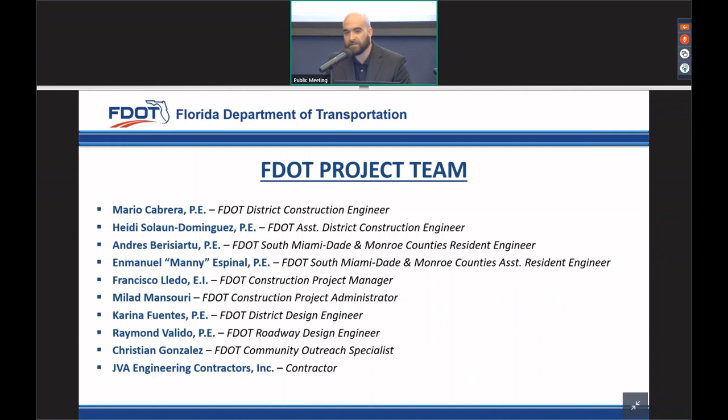To introduce our project team, here with me at the front, I have Francisco Lledo, who is the FDOT Construction Project Manager, and Raymond Valido, who is the FDOT Roadway Design Engineer. With that, we will start our presentation, and I will formally introduce you to our project manager, Francisco Lledo.

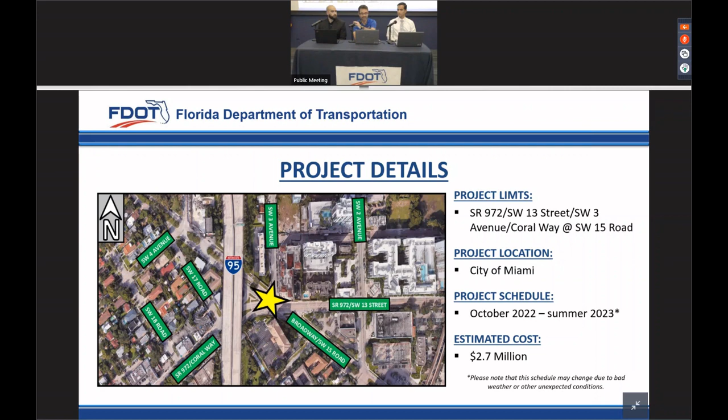Hello, good evening. Thanks for attending today's meeting to talk about this exciting project. Some project details that we're showing here in this slide: the project limits for this contract comprehend Southwest 13th Street, 3rd Avenue, Coral Way, and 15th Road. The start date for this project will be October 17th, next Monday, and the estimated completion date will be around summer 2023. The project budget is around $2.7 million.

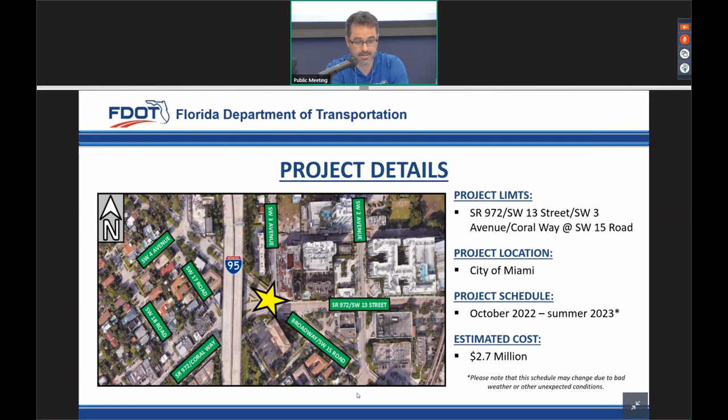Currently, 13th Street, Coral Way, east of the intersection, carries around 26,500 vehicles per day, while Southwest 3rd Avenue, Coral Way, west of the intersection, carries an estimated 30,500 vehicles per day. Movements throughout the intersection result in a very skewed approach, unconventional geometry, and provide minimal opportunities for pedestrians to safely cross the road. The existing intersection alignment currently prohibits several vehicular movements: eastbound Southwest 3rd Avenue, Coral Way, to northbound on Southwest 3rd Avenue and Southwest 15th Road; westbound Southwest 13th Street and Coral Way to southeast on 15th Road; and southbound 3rd Avenue to eastbound 13th Street or westbound 3rd Avenue Coral Way.

Upon completion of various traffic studies conducted between September 2013 and August 2017, it was concluded that the preferred alternative would be a roundabout with metering signals, providing traffic greater access to the immediate area and improving pedestrian mobility.

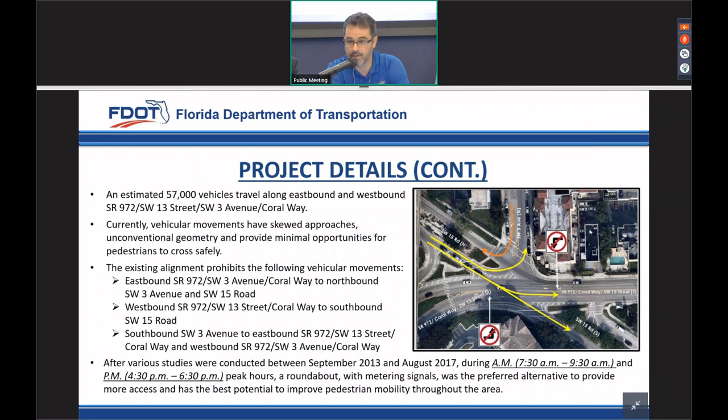So the scope of work for this contract includes reconstructing the existing intersection into a roundabout, installing high emphasis crosswalks, installing new drainage structures, removing on-street parking along 3rd Avenue north of 15th Road, replacing existing high-pressure sodium lights with LED, and installing new decorative light poles. Also, we're installing new pedestrian and vehicular signals, enhancing landscaping, and repaving and restriping the road.

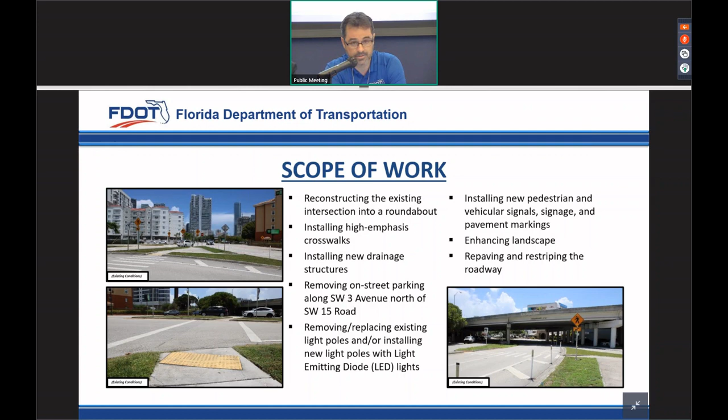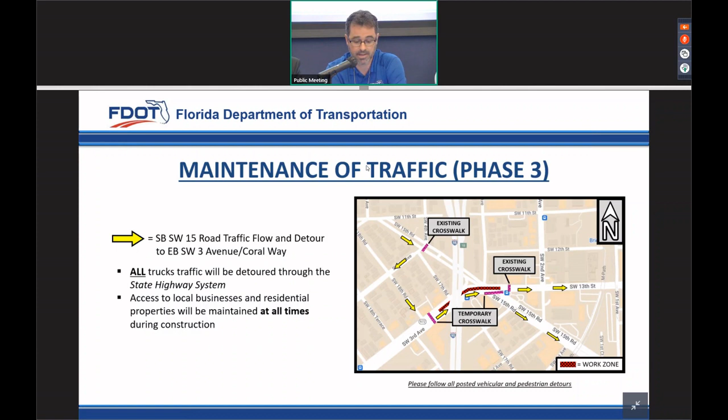During phase 3 of the maintenance of traffic, the yellow arrow shows an alternative route very similar to phases 1 and 2, for any vehicle traveling southeastbound on 15 Road and trying to access the south leg of 15 Road and 13th Street. Vehicles will be detoured through Southwest 4th Avenue, and in this case through 18 Road, and finally Coral Way. Truck traffic will be detoured through the State Highway System, and access to local businesses and residential property will be maintained during the whole life of the project.

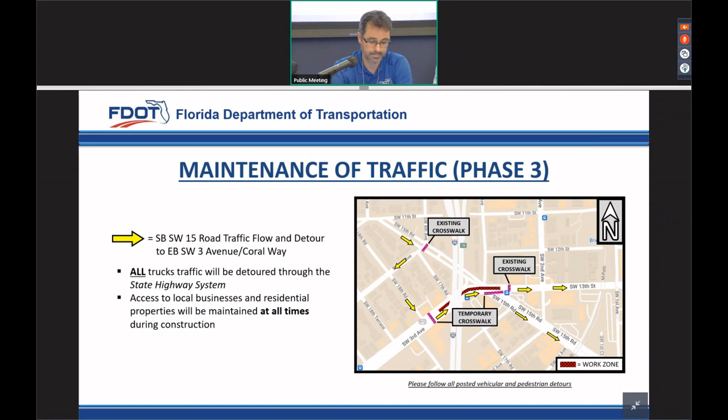This intersection is proposing metering signals on 3 of the approaches of the roundabout. We have one on the southeastbound on 15 Road, another one on the northeastbound of 3rd Avenue, Coral Way, and the third one is on the southbound of 3rd Avenue.

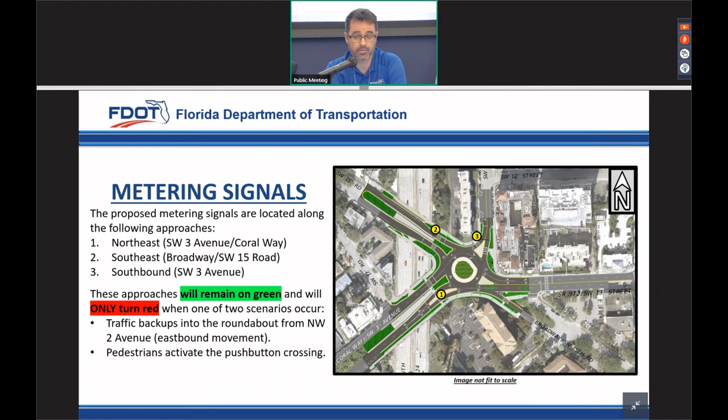It's important to note that these approaches would remain on green and will only turn red when 2 particular scenarios occur: traffic gets backed up from 2nd Avenue eastbound movement, and/or when any pedestrian actuates the ped post, trying to go across the road.

Thank you, Francisco. Some of the things we are expecting during construction: please make note of traffic shifts and uneven surfaces during construction phases 1 and 2, throughout the project corridor.

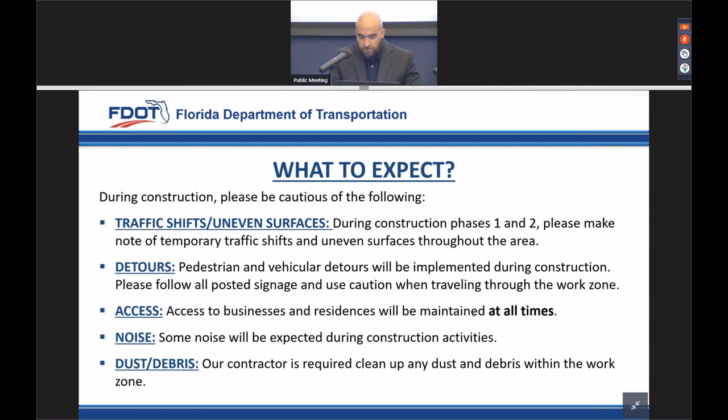As far as detours, although we do have pedestrian and vehicular detours implemented, during construction please ask the public to make sure they follow all posted signage and use caution when traveling through the work zone. As Francisco mentioned earlier, access to both residents and businesses will be maintained at all times.

As far as noise, it is to be expected during all construction activities. Regarding dust and debris, we will ensure that our contractor cleans up any dust and debris left behind within the active work zone.

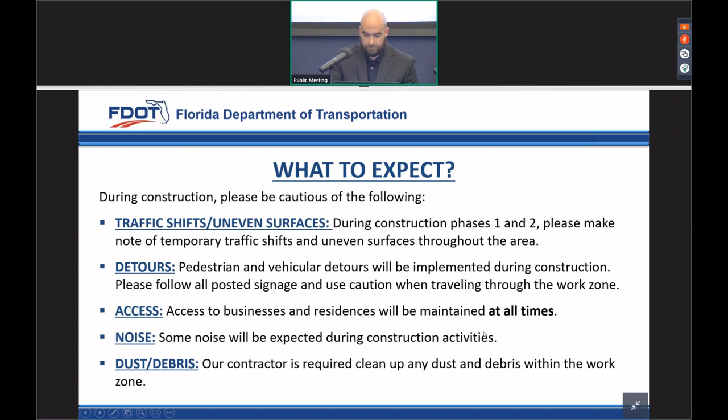In addition to both pedestrian and vehicular detours, travel lanes and sidewalks shall be closed only during non-peak hours on non-event days. Those non-peak hours are 9 a.m. to 3:30 p.m. on weekdays and weekends, and 9 p.m. to 5:30 a.m. Sunday through Thursday nights.

Again, please note that all construction activities will occur in phases to minimize the impact to the community. Lane closure information will be posted weekly on the department's website, fdotmiamidade.com.

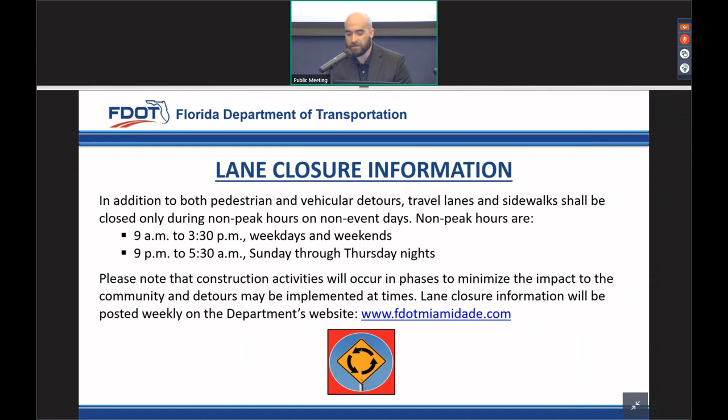Some additional information and tips on how to access roundabouts. Roundabouts have been shown to reduce injuries and fatalities by up to 80% and are designed to travel in a counterclockwise direction. Before entering the roundabout, we ask drivers to know which way they want to go first. Once in the roundabout, drivers must yield to other traffic, pedestrians, and bicyclists coming through the area.

We ask motorists do not change lanes or stop within the roundabout, and please obey all posted signs and speed limit. Additional information regarding roundabouts can be found at fdot.gov/agencyresources/roundabout.

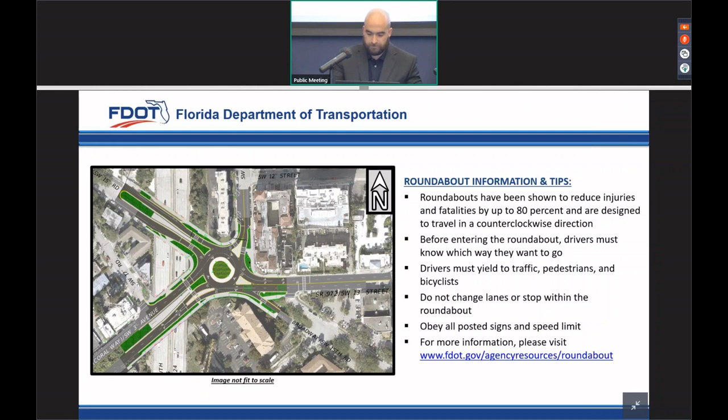As far as community outreach, our outreach consisted of door-to-door distribution to all businesses in and around the corridor. We're also having mail house distribution, where those attending this meeting did receive or should have received a postcard indicating this meeting was happening both in person and virtually. We've had briefings with both elected officials and special groups to ensure all aspects of this project were met and everybody was notified properly.

As far as electronic and digital distribution, we're going to be using Constant Contact as our mass mailer system, and also general email communication. All this information that we're presenting here today can be found on our project website, including the presentation you see behind me, all the reports, updated lane closure information, and the public can also sign up to receive email updates directly from our website.

We do encourage the public, both virtually and in person, to sign up for email updates so that the entire community and the entire public is kept up to date and in the know with what's going on regarding this project.

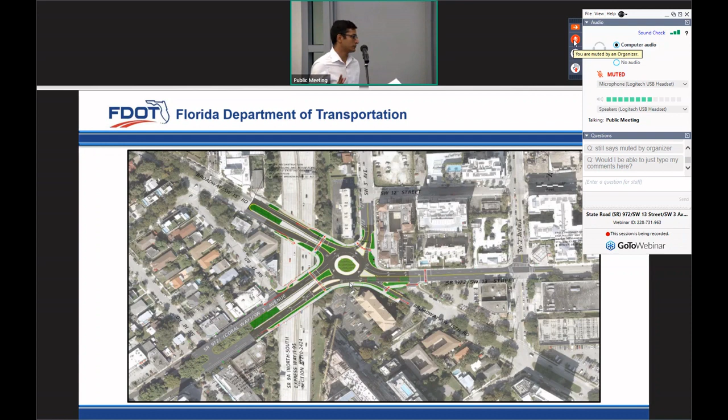The pedestrian is not competing with anybody else. It's the time for you, the pedestrian, to take that time and walk, which is per the FDOT standards. So nobody's competing with anybody, pedestrians have their own time. No, I'm not saying how long you have to walk across, I understand it's enough time to walk across. I'm saying how long is the waiting upon actuation of the button? It's always going to be immediate. From what I'm seeing here, it says 4 seconds, if I'm reading it right, before the actuation starts. So you're looking at just a matter of seconds.

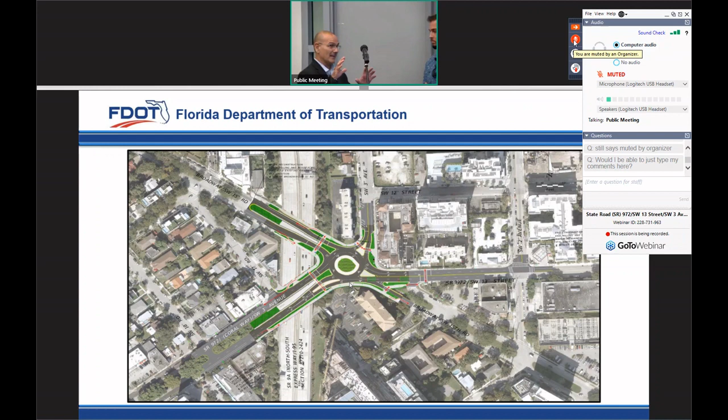You're always looking at just a matter of seconds. Miami-Dade County will always prioritize the pedestrian crossing over the vehicular, specifically at this intersection, because you have schools and a lot of volumes of pedestrian and bicycle use.

So will Miami-Dade guarantee that it stays 4 seconds or less? Can you guys put a guarantee on it? Because there's a traffic actuation signal on US 1 that used to get pressed, between 22nd Ave and 27th Ave. It's like the safest place to cross US 1, and FDOT reduced the timing on it. I know these sequences can change rapidly, and it's a very little thing that no one notices, but it makes walking and biking way harder.

So look, we have the plans that we're open to showing you. Mike Sodi and his team handle a lot of the timings through DTPW. We can ensure you that this is a pedestrian signal, not a regular vehicular signal. We're more than willing to sit with you afterward and walk you through it, and provide you an email of how we typically do that, what the typical timing would be, but we would not violate any of the national criteria, which considers walking time and the amount of time you actually have to cross.

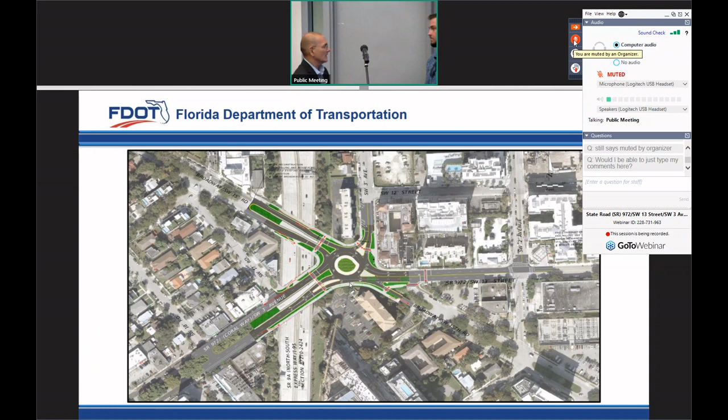Okay, I get it, but the guarantee is the pedestrian will be prioritized. That would be the guarantee. I know, but it's like a breach of a guarantee because we're already not prioritizing the pedestrian. Prioritizing the pedestrian would have meant raised crosswalks and all these other things we've talked about. So we're already going into this with an extra negative, and now the guarantee is that we're going to prioritize the pedestrians, but everything up until this point hasn't.

So it's tough, I respectfully disagree. I think we are prioritizing pedestrians, we have road plans, and we're more than willing to discuss this. I will stay here as long as necessary to have these discussions, and we're more than willing to put this on record in the meeting minutes. But I respectfully disagree, we are prioritizing pedestrians. Thank you, Ray.

And why was this particular crosswalk preferred over a flashing yellow light? That's where I'm confused, because as a pedestrian, I prefer when I press it and it immediately starts flashing. The flashing signals to drivers to stop, and to me it feels more safe and effective than this. Is the red light the safest option we have for pedestrians? You're getting a physical red, which legally requires you to stop.

Rectangular flashing beacons, inherently, people get used to them. Somebody presses it, there's nobody there, right? But legally, you're required to stop on red for these. This is the safest option we have when compared to other alternatives.

Okay, I understand that perspective, and I also understand it's a little concerning. Hopefully it doesn't turn into a 10-second wait, a 30-second wait, because that would again minimize the demand for walking and biking.

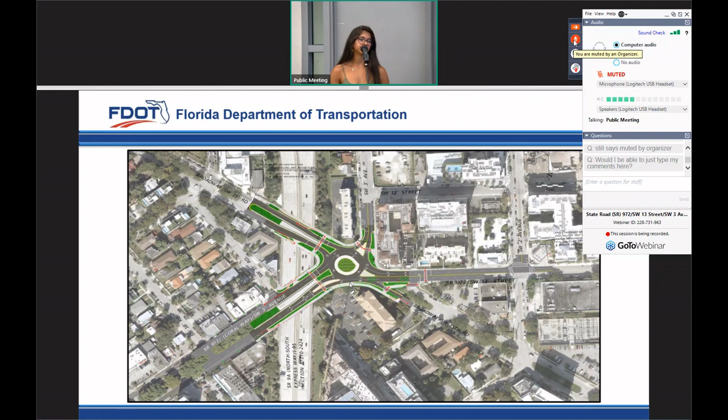So what I can say is Mike Sodi and his team, as well as our teams, look at our corridors on a 2-year, 3-year basis to make sure we have the appropriate timings. So this is not something we're going to forget. I don't imagine it will ever actually be decreased. We are providing the appropriate timing, and I imagine there's going to be adequate timing. We can provide that information to you guys. Okay, thank you.

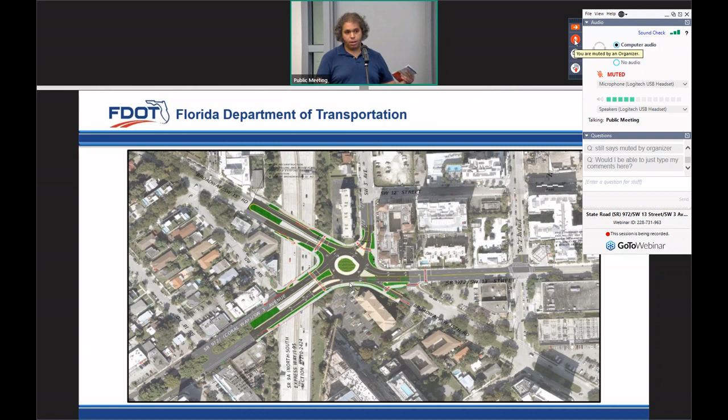Holistically for Miami-Dade County, FDOT is responsible for design and construction. However, as an agency, we handle overall maintenance and operations in Miami-Dade County. So the signal timing at the end of the day is done by Miami-Dade County and Miami-Dade County only, through any FDOT or DTPW designs within District 6.

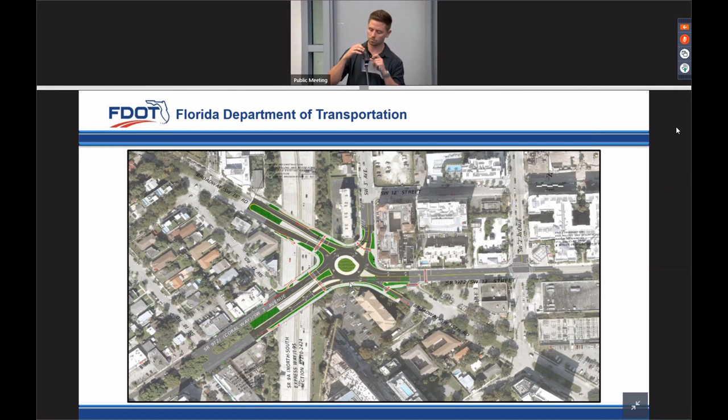Hello. Just reading, removing on-street parking along Southwest 3rd Avenue north of Southwest 15th Road. There's a couple of businesses around there that mostly use that to park. So I'm just wondering where all that parking for those businesses will be reallotted to, or what's the plan for that?

So I can talk about the thought process. The need to provide directional access in that particular area required us to remove a number of parking spots - it's not a large amount. There are other locations, and I know this may not be the answer you're necessarily looking for, but there are other locations with on-street parking. There's also lot 30, which is I guess one crosswalk away. This was coordinated extensively with the City of Miami Parking Authority. Related to additional parking, I think that's a question we'd probably table and take to the City of Miami.

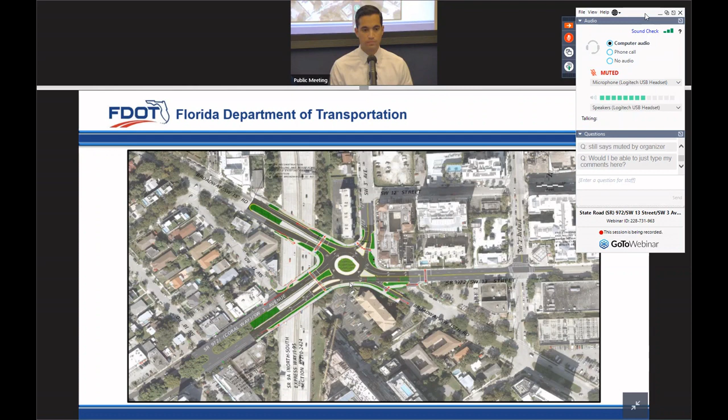I would just make one rebuttal to that, which is many points were brought up on expanding the concentric circle that informs this design. I think with the back bay study, walls are even scheduled to be built in this area to prevent flooding through the Army Corps. And there are a lot of things being brought to bear with federal funds that are going to intersect with this project in the very near future, within the next 10 years.

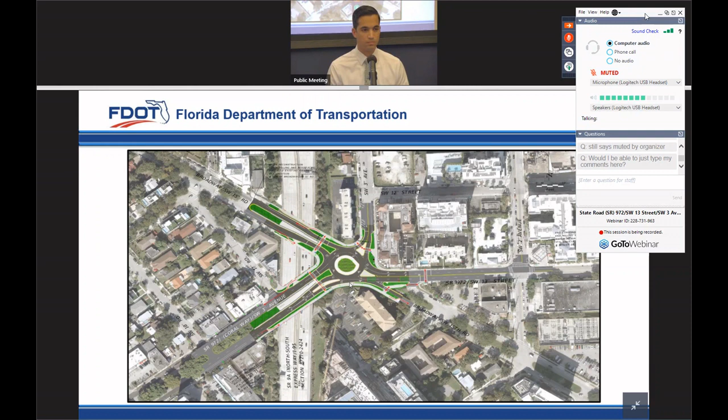And for us not to be considerate of those points, meaning being comprehensive and expanding the concentric circle on how you design, is missing an opportunity. A perfect example is if it does slow truck traffic by putting a raised crosswalk with the signal, which is a double effort for prioritizing pedestrians. And yes, if it does do something with flooding, well then you address that.

But the reality seems like there's a bridge too far, and when dealing with safety, I don't want to feel that FDOT is saying we've done considerable engineering. The bottom line is we put money forward to budget in engineering. We've reached a common ground that we feel provides a basic level of safety, meets minimal ADA compliance, which therefore I guess means it's a best practice.

But effectively, we're pointing to other best practices that can be integrated into the project, and it doesn't seem like there's consideration for integration or folding or revising the design. And yes, it would require you to go out and apply budgets to more engineering, re-engineering, and reapplication.

But once you start surveying and breaking ground in two weeks, like you have on schedule, which I know your bosses are telling you to keep, and this program has already been expedited, that means there's no coming back. So all of these voices that have voiced opinions counter to this current design are for naught. I just want to be clear that that's the case.

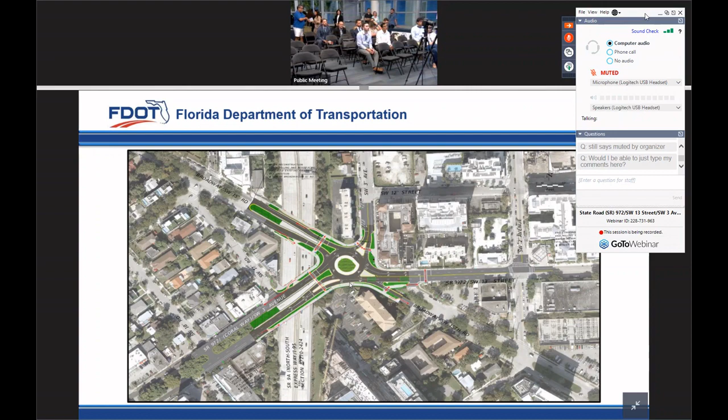And I didn't get a really clear answer. You stated that you would get input, but it really sounded to me like the design is frozen and we're moving forward with this current design. That's what I want to hear from you: is the design frozen, and are you moving forward with this design?

And when I say design, I mean comprehensive design, not a frill or a turn signal or a left turn access. I'm not talking about that, that's not changing the design, that's making an exception. Is there any willingness and any opportunity to change this design? Yes or no?

Mr. Gomez, I'll be honest with you, you have a very, very packed question, and it's difficult for me to understand. It was only one question, it was only one question.

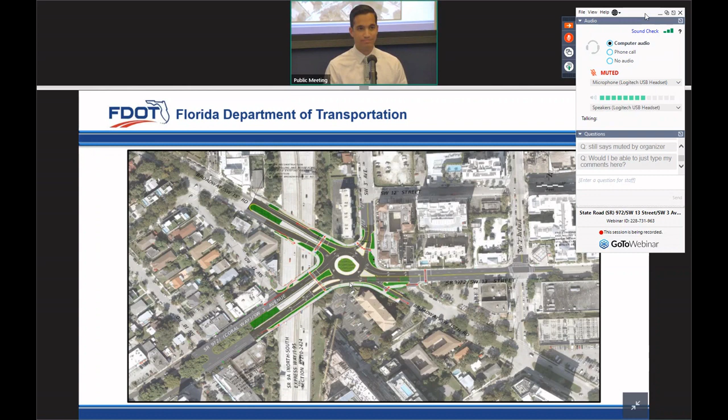Can you change the design as shown right now? If the public's input is that we want stoplights, can you change this design right now, or has this ship sailed?

We are actively looking at the comments that we have received, and we will make sure that we provide the appropriate engineering solution to the area that considers all different mobility needs.

Okay, so that's a no, the ship has sailed. That's clear. Okay, thank you for the input. Thank you, ladies and gentlemen, enjoy the rest of your night.